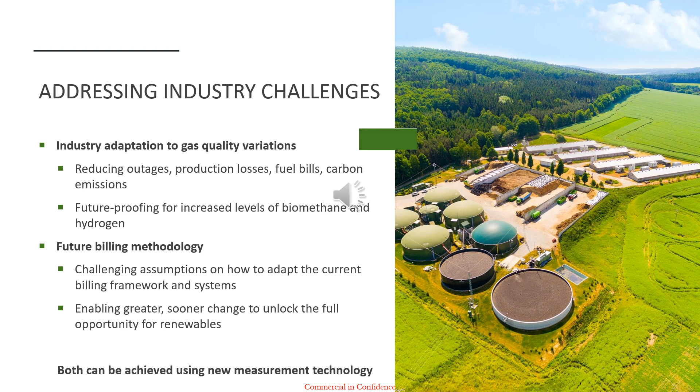A piece of technology we're developing to help tackle this is a low-cost gas quality analyzer that can be deployed in hundreds or thousands across the gas network, to give much greater detail about the real gas quality in the gas line being delivered to domestic and industrial users.

One reason for that is the gas quality measurement we use today is extremely expensive and complicated, expensive to maintain, needs specialists to do the work. Keeping them is not really an option, it needs analytical expertise sometimes just to get those things to sing.

What we're developing is a low cost, simple instrument that can be deployed in large numbers across the network, rather than the few hundred measurement points we have now. That will allow you to create much smaller, much more accurate billing zones, so you're much more likely to get the gas quality that's written or displayed on your gas bill.

Another feature of this technology we're developing is a zero emission analyzer technology. Conventional gas analysis equipment takes a sample of gas from the pipeline, reduces the pressure, filters it, and delivers it to your analyzer somewhere away, which takes a couple of minutes.

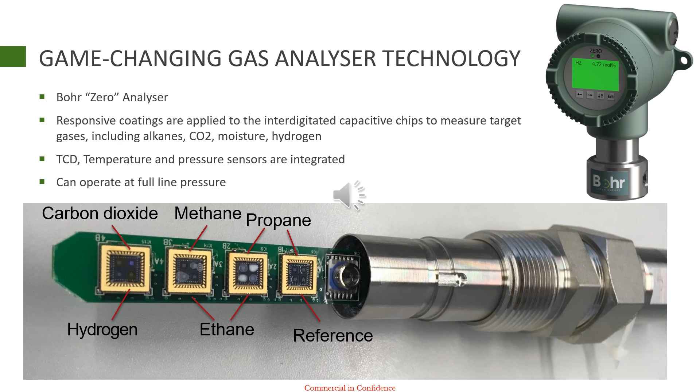The way this technology works is it has these chips, interdigitated capacitive chips, and that's a main focus for presentations. What they do is measure capacitance across the surface of the chip, and we've developed special coatings that sit on the surface and selectively absorb different compounds from the gas mixture.

One coating was developed to selectively absorb methane, one CO2, one hydrogen. As the coatings absorb their molecules of interest, it changes the capacitance on that chip, and that changing capacitance can correlate to a partial pressure of that compound of interest. So we're developing coatings that, within the compound of the gas mixture, give a complete picture and deliver gas quality information within seconds.

As I mentioned, it's zero emission, which is going to be very important. It's not written into any standards now, but it should be. Today there are 120, 140 or so measuring points, thousands of gas analyzers on the gas network in the industry.

It takes the sample and analyses it, and after it's finished analysing it, it goes to atmosphere. If you imagine there are hundreds, if not thousands, of measuring points all around the UK where we have natural gas going straight into the atmosphere.

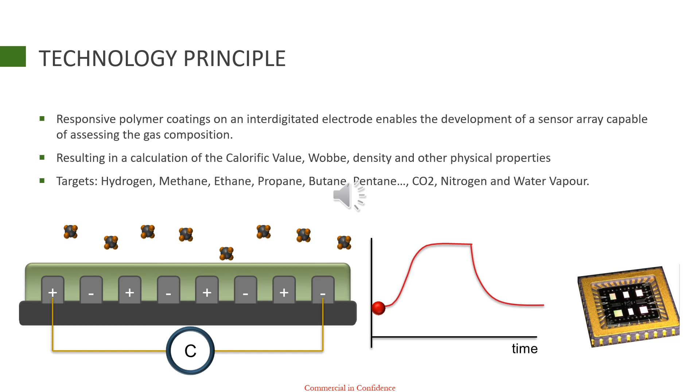And we installed a couple of our sensors - actually 3 sensors - in the boiler house a few hundred metres downstream, continuously monitoring the blend stream feeding the boiler house.

Actually, in the boiler house it's quite interesting - it has 8 boilers lined up as part of an experiment. So 4 different boiler manufacturers, you can probably guess them, each provided 2 identical boilers. One was fed with a natural gas feed, and one was fed with a blended natural gas and hydrogen feed.

We weren't told which one was which, and at the end of the trial, after 18 months or so, they were given the boilers back and asked to say which one they supposed had the blended gas, based on whether it gave nice, correct running performance.

Anyway, the point I was going to make is the sensors we installed closely tracked the data given by the gas chromatograph, which means there's a couple of points really of interest.

First of all, the 3 sensors we installed agreed with each other - hooray, that's a good start. But also, they matched the gas chromatograph data, an industry-recognised instrument providing accurate information, which is what's used for calculating the calorific value today.

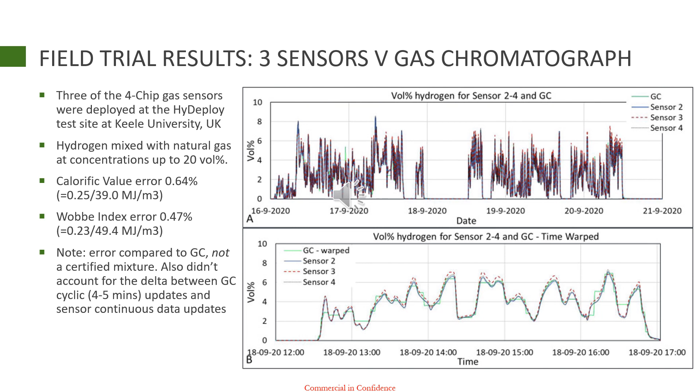At the moment we're working on plans to improve the accuracy, reliability, and repeatability - all the small incremental improvements which are really important for qualification of the instrument, especially.

So yeah, we're looking at using this for billing, also for industrial use. We can use it as a standalone instrument, but actually by shrinking down all of the analysis onto just these chips, that opens up the opportunity to do a lot more.

You can see on the table we've actually got a domestic gas meter, and what we've done - it's not a real system, but we've shown the concept - is we can install the chips on the inlet part of your gas meter. So at a property level, you could have the gas quality as well as the volume data, so you could bill the flat based on the actual energy used by the consumer.

We could also install it inside other pieces of equipment, like a control panel, for example, or different types of equipment that might be affected by the introduction of hydrogen or by gas quality fluctuations. So it allows us to integrate into existing equipment as well as having it as a standalone unit.

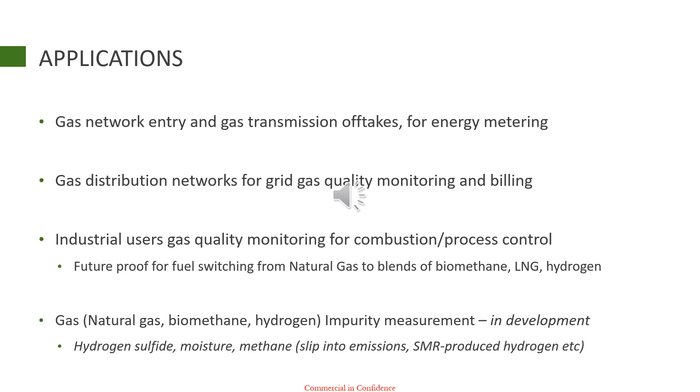So we have the subsequent trial at Winlaton in the northeast. We actually used solar panels to power it because it was on a grassy verge on a road junction with no power going to it. So we used solar power to power the analyzer, as well as another analyzer we used as part of the trials, providing gas quality monitoring and to compare results. The solar panels could get nicked - we were worried that was going to be a risk to the program - but they survived the check. In doing so, what we demonstrated is, I believe, the world's first solar-powered hydrogen natural gas zero emission analyzer. I posted about it on LinkedIn and nobody complained, so yeah.

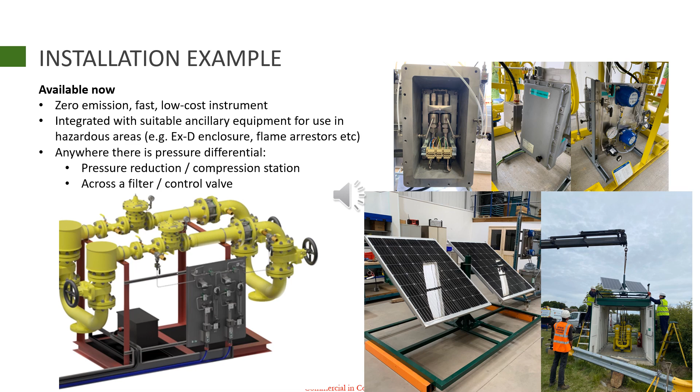What we're looking to do to move this forward - the next step is that maybe it has a conventional cable to supply power and receive communications, but what we're going to do to move this technology forward and make it even more deployable with large numbers across the gas network is to make it battery powered with wireless communication, to provide data points for a local data collection point, to validate that data, and carry it as part of the new billing system or campaigns that plan to allow users of gas to adjust their energy ratios or fuel plans at their end.

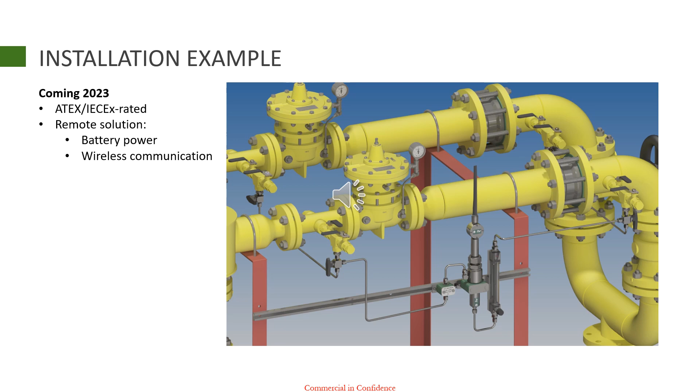What we're trying to do is introduce the concept of a really smart meter that actually knows what gas it's getting, as well as how much it's getting. The concept is that we can set much lower numbers - even if it's not at individual postcode level, we have at least one per street - and get a much better and more detailed view of what gas quality is being delivered to the homes and businesses in that area.

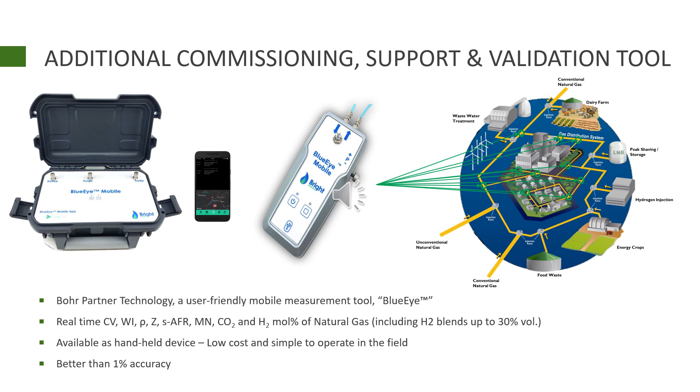But the reason I mention that is, by having a better view of where the gas is going, being able to track it, being able to assign gas quality to users, you will be able to introduce biomethane directly into the grid without the propanation. Those that receive low quality gas will receive richer gas, biomethane, and everyone benefits. So in that way, we can move away from propanation, and also we can open up the market. That's about it, thank you.

Any questions? Got a question?

Fantastic concept, but how did the idea come from? Was it customer driven - somebody saying there's a hole in the market that needs something? Where are the analyzers that fix this?

So they looked around for measurement technology, and how many points they'd need to make a tangible difference. They came up with different scenarios, and I think the latest is they have a new improved billing model with 200 to 1,000 additional measurement points. Or you could have 10,000 additional measurement points, or better still, 44,000 different measurement points coming down to the governor station level.

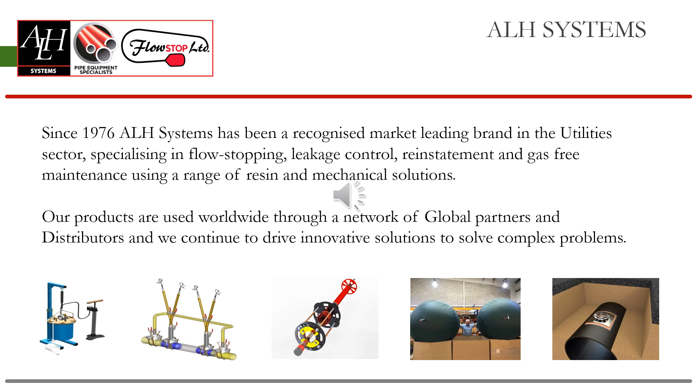This is about a new innovation we've been working on. Unfortunately, I have to keep plugging Mark's input throughout this, it's a joint project and something that's taken a lot of our time.

There's a couple of different options for tech, you can do it internally or externally. PE, steel, no problem whatsoever, we've been doing this for years. Single operative working, gas free, you don't have to excavate. We've been doing it 30 years.

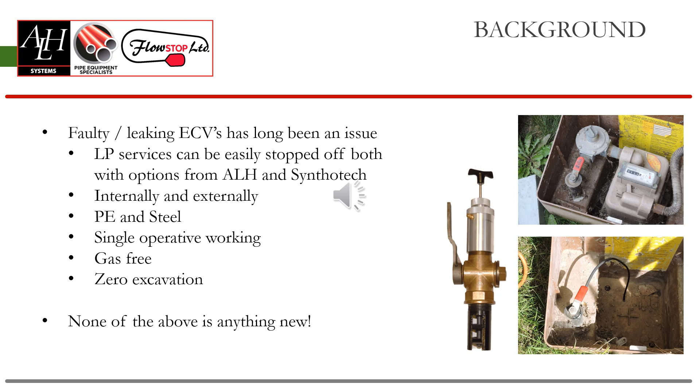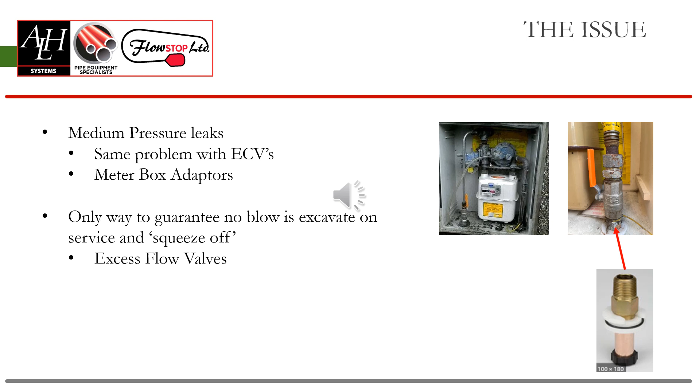Gas Networks Ireland's approach to the problem is simple, they go one step further than us. They've got a 4-bar network, and an awful lot of meter boxes, as you can see there, on private driveways in gardens, etc.

They've estimated circa 350 meter box adapters in addition to these ECVs and leakers, and they put a program together to go exchange them. There's currently no way of carrying out the exchanges other than digging down, so it costs time, money, etc.

This is a huge problem for Gas Networks Ireland. It also doesn't help them that when these big spot leakers are found, there's no one issue, it's not all coastal or inland, it's all over the whole of Ireland, in the middle, on the coast, all down, so everywhere. It's obviously just a scattergun.

Another problem is that their network is made up of two different sorts of services. They've got 25 and 32 mil, quite unusual there, and they've got lots of copper services too. So again, we've got issues.

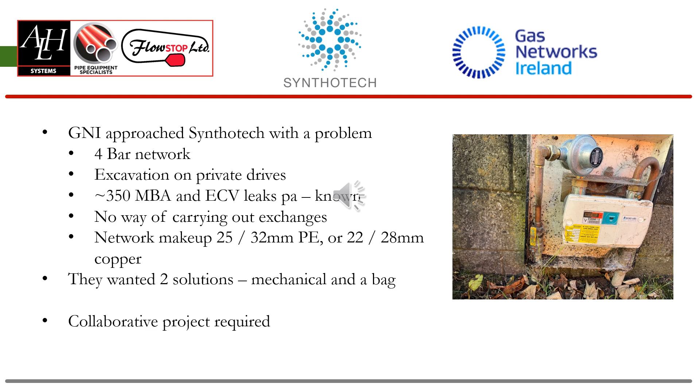This is where the challenge came in, they wanted two solutions: a mechanical solution and they wanted a bag. So, as they said, we're going to plan two projects here, something that we think should be relatively easy for you guys to resolve. This started off just before COVID, and here we are now.

Synthotech already had designs of a mechanical solution, they've advanced it a bit further, and here we have two examples of it working. However, creating a bag was troublesome.

New vertical, new thinking. As we all know, ALH and our sister company FlowStop have over 30 years of experience with flow-stopping gas, that's what we've done for years. Not a problem, said Mark. However, the problem, remember the problem,

we're stopping on 4 bar, that's a problem. We need to find the right material to seal it and hold firm inside the PE and the copper, and do one and maybe not the other. It's going to have the capability to hold off for periods of time, I want to hold that.

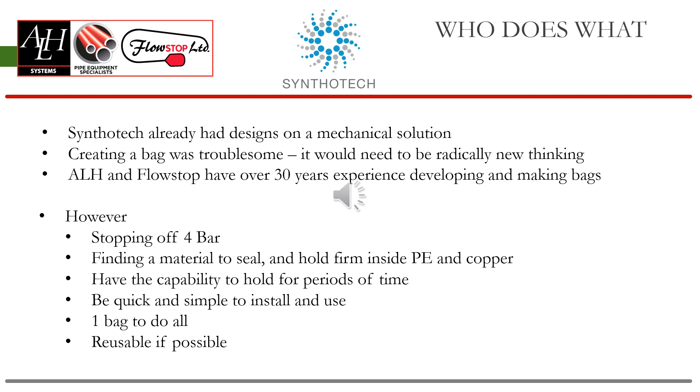So first, what's the challenge? The first challenge is to understand limitations, 4-bar ECVs are wildly different. You're going to fully open bore one, just on the way out there, then you've got a more popular one, shall we say, only 14mm in diameter. But again, we're going to have a challenge now, we're going to get something through, something pretty small.

Length of the tether - we're going to put a tether on the end of the bag. What does that matter? When we get it past the meter box adapter, what's going to make it strong enough to shove it in? You also want to consider the confines of the meter box, but again, you've got a vacuum going through it. Each challenge still remains. This is 4 bar in the back, so I'm not trying to hold back the bag.

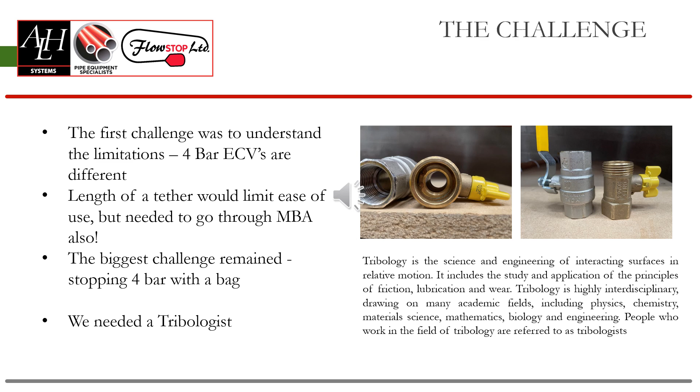So we looked at it and realised what we needed was a tribologist. Does anybody know what a tribologist is? We didn't know what a tribologist was either. Tribology is the science and engineering of interacting surfaces in relative motion. It includes the study and application of principles of friction and lubrication. Tribology is highly interdisciplinary, drawing on many academic fields including physics, chemistry, material science, mathematics, biology, and engineering - those who work there are called tribologists. So there you go, we found tribologists.

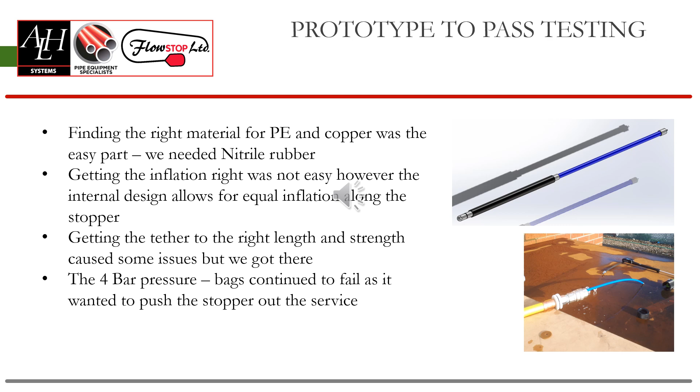There's 2 of us in the room here.

And they also got me as well, like that, so I can understand them.

So the issue with the 4 bar pressure was pushing the rubber backwards, and it caused it to fracture, as I said. So we needed something like an iris blade, something that's going to hold the bag. What he got for us was petals. You got the example? There you go - that's a petal.

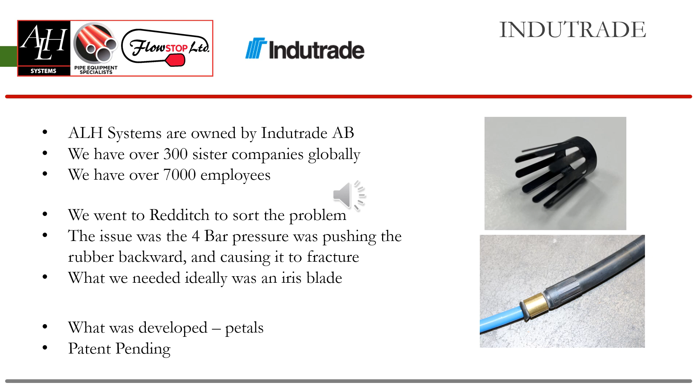So as I was saying, we started off with various bags of each shape - you can imagine the trial process. We eventually settled on a normal bag, too big surface area and strength. The petal at the top and on the bottom, which doesn't make sense - it's kind of early on, the pressure's coming up through, obviously, the surface. We literally, on this end, you can imagine the pressure was keeping it in a nice stable position.

So what you do is one version that expands fully, and the end of the petal does touch the inside surface of the rod. They don't rip it, they don't pierce it, they're not like anchors on it. They simply push against it and stop. Literally rubber with the bag getting past it, because we keep it just tight on the shape, which allows the pressure inside the bag to stay where it should be rather than escape that way.

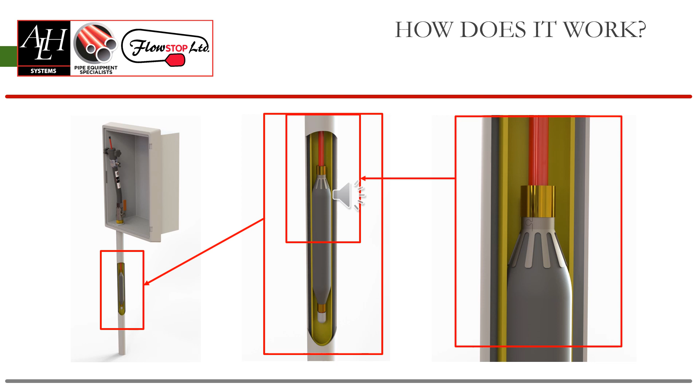We were working in ALH and HQ, we went for trial and all applied, so the only trial we really can trust is to go on site and actually move it. The first place we went was Bolsover, GTC, and there were straightforward ECV exchanges with the guys there.

It was perfect for us, lots of easy access to do what we needed. You can see here it allowed us to go over how long they needed to be. We could measure where the bag would be, how long the tether is within the surgeon head, and go over the ratings and get all that correct.

We also confirmed the angle, so if you look at it, we'll see it later if you want to come and have a look. There was an angle on the actual surgeon head, so we confirmed that was the right angle to allow us to get out of the box. We also had to check you can tighten it up and get your hands around it.

So that was a good day. We went through 11 ECVs, good exchanges. The guys on site got to the point where they could see how quickly they could actually go through them and tried to beat each other, which confirmed how simple we made it.

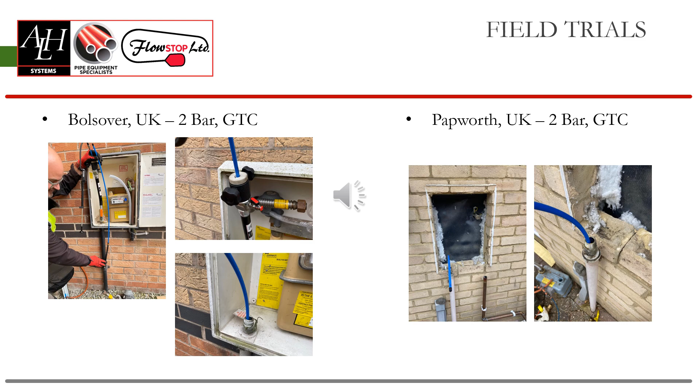You want to see it, and it just works. One of those bits that just works.

We went on to Ireland. I've got a beautiful hand model, if you can recognise the hand. This was a test for 4 bar, intended further on. So we went to Dublin, to GNI. This was actually at the headquarters.

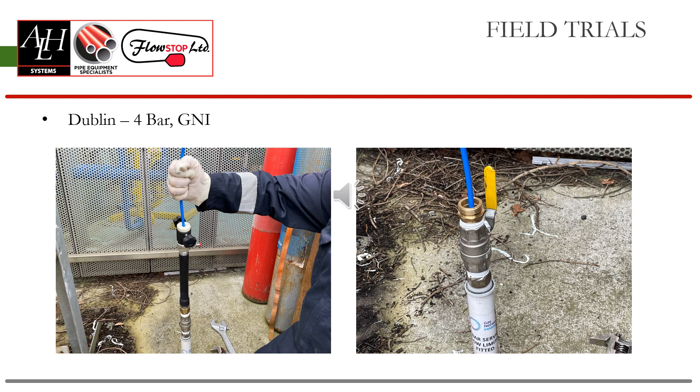Our beautiful assistant put it in - good job, perfect. We also used a Synthotech mechanical version.

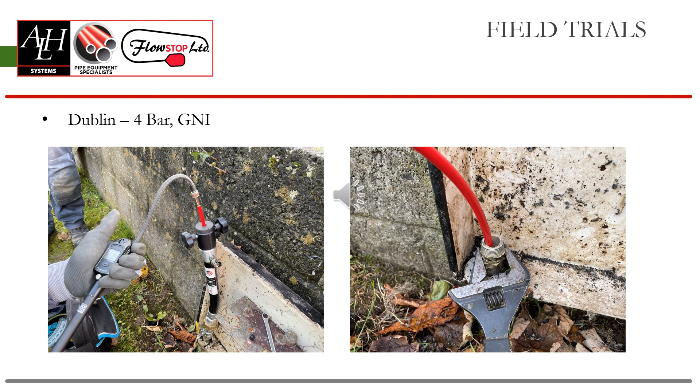So, this is after the job. This was actually on the rear, the rooms were there. So you can see afterwards the pedals, the bag - we go to the bag, deflate it, take it out of the job, and that's what we're left with.

So they do decompress with the bag, but they don't walk away, or you can manipulate it down flush. As you can see, we have a tool in the toolbox at the back - it's just got a simple hole in it. Before and after, you push it through the hole and it fits.

So remember what we said at the start - the idea was to use this a few times. What we found is they're inherently relatively strong anyway, but you don't want it to be strong enough that they stick out and don't go back in. If they stick out, you won't be getting back through the ECV. What this also does is once you've gone through it again, you know it's gone past the set point and it won't collapse back down.

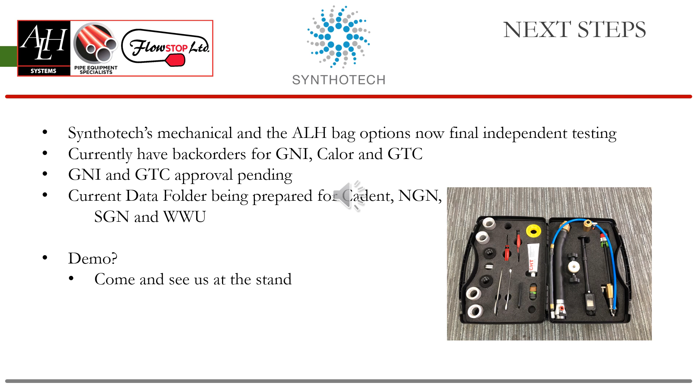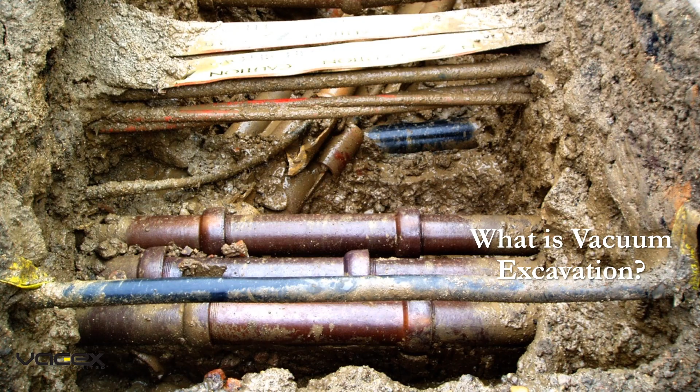About 60,000 of them in some sort of strike, just in the UK per year. Average to get in the home and repair the damage is about £4,000. What people don't realise is a lot of that cost is associated with that and not damage, because there's fees, downtime, the run-down process, inspections, student claims, it goes on and on.

Therefore, Birmingham University put a figure behind what this costs per strike, including the indirect costs - so £100,000. That's the cost in the industry.

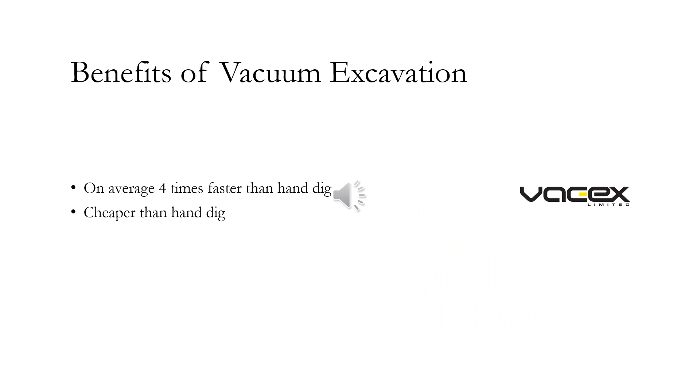Benefits of vacuum excavation, the obvious one - it allows you to excavate around services and tree roots with minimal risk of damage.

Even though I'm thinking, the spoil can be stored in the actual excavator and tracked away from the digger and someone's drive, tracked away to a convenient location so it's not blocking people's access.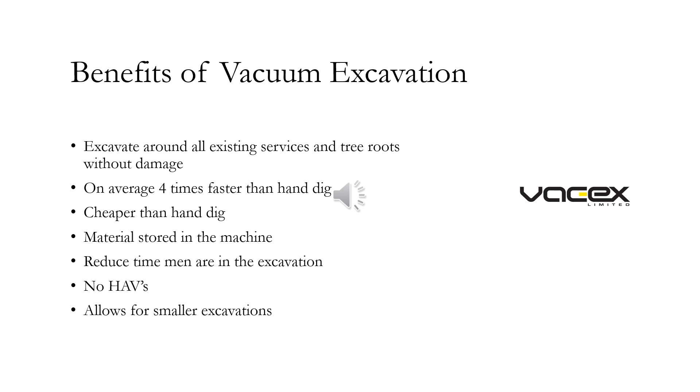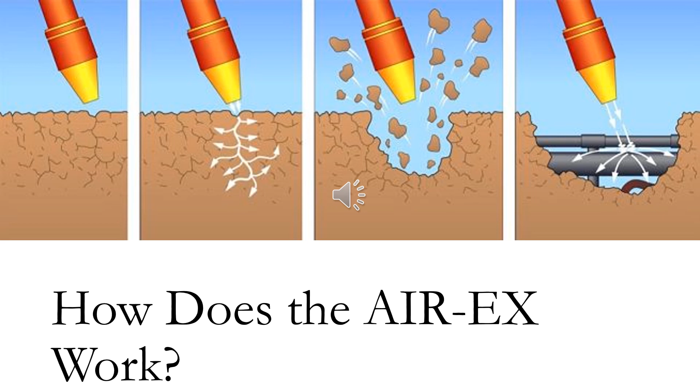This is a test. Vac-Ex is so non-invasive that we buried a standard fluorescent light and used the AIR-EX to uncover it without breaking the fragile glass tube.

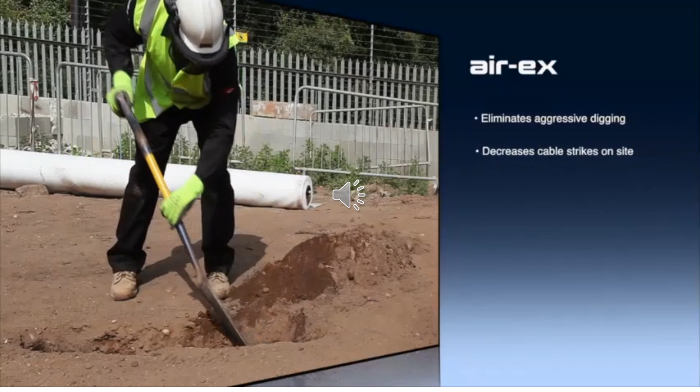Try doing that with a shovel.

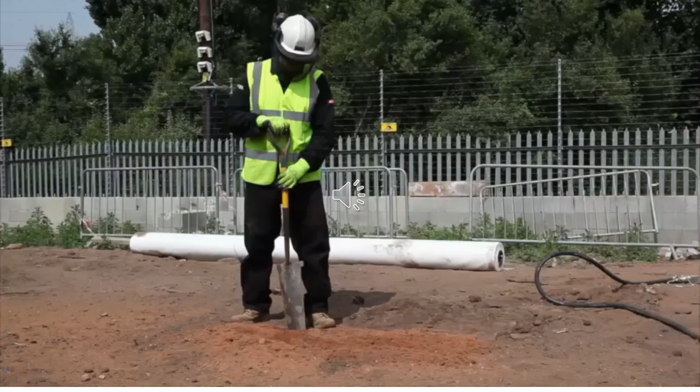Pictures of the AIR-EX, as we manufacture going, are our vacuum units.

We've got no sparking tip on them. Low pressure trigger. For each shield on there's a lot of compressed air to kick out a lot of heat, and I need to get that off as you've done. We've got a hand guard to protect the knuckles.

Again, no problems with vibration. The whole shaft of the tool is plastic and non-conductive. We had that tested by the National Grid, which was approved at 5,000 volts. That's the biggest standard.

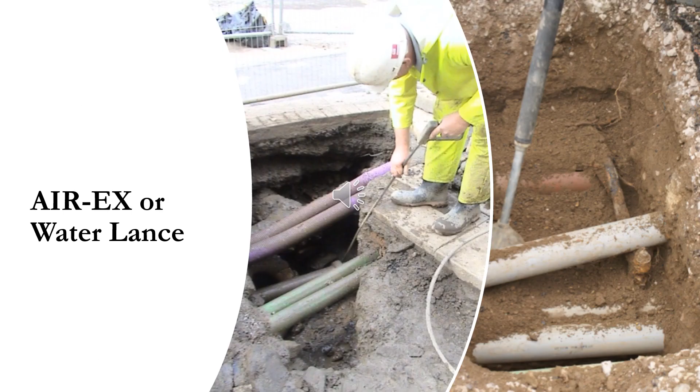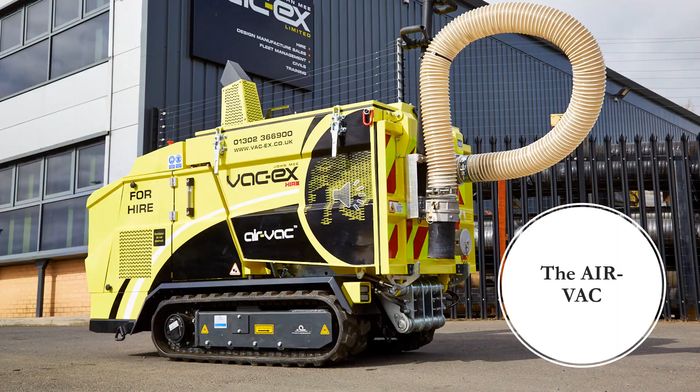Smallest tube in the AIR-VAC, so on the far side. On the machine, got information in terms of things technically.

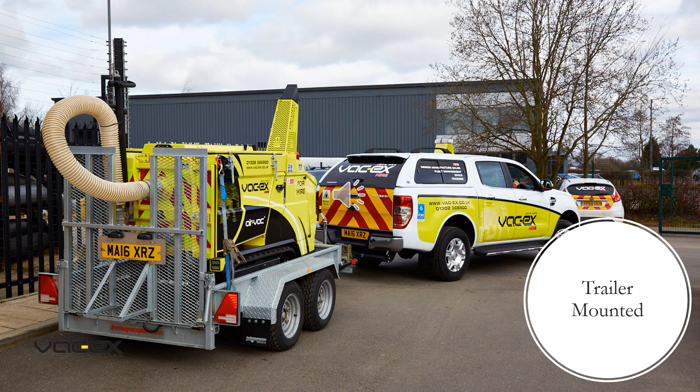Two-man operation. You've got one operator using the AIR-EX, another one vacuuming.

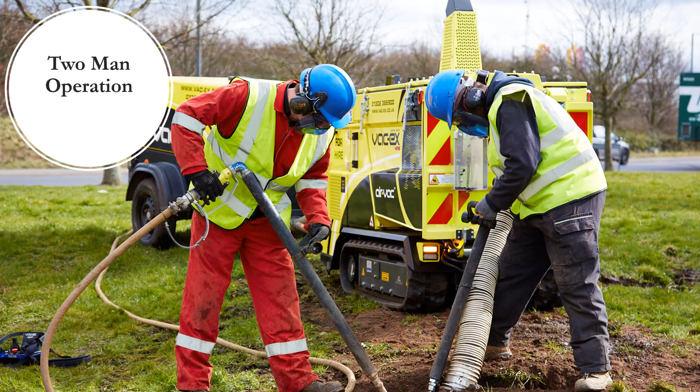This machine actually works and is essentially typically towed by low trailers. You need a compressor with it, so there's not a compressor mounted in the van. There's like a mobile compressor that you can turn around with the air.

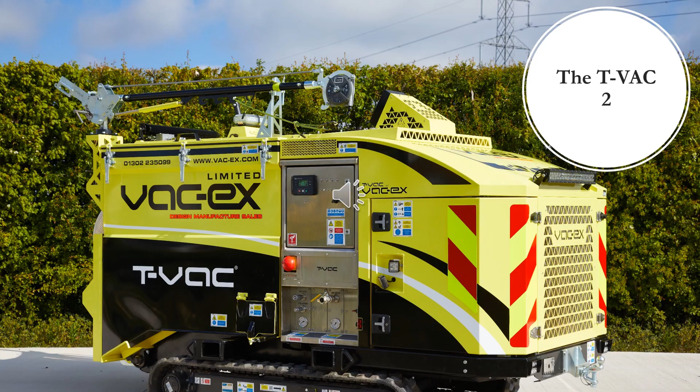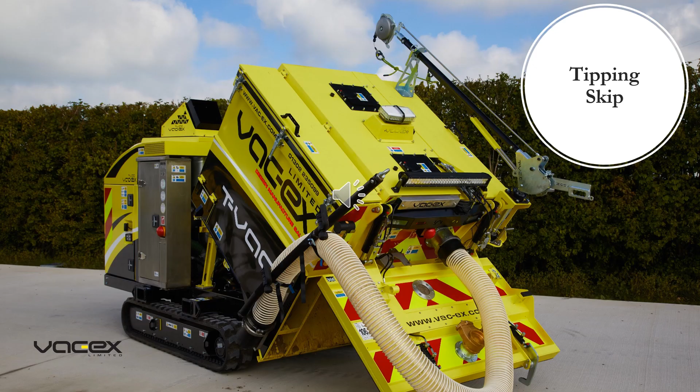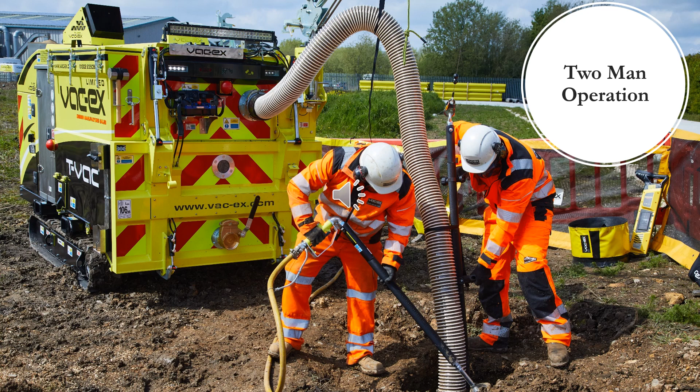Two man operation.

Training must do operation, training must have 6 hours. Generally, it's manufacturers and organisations who gets it.